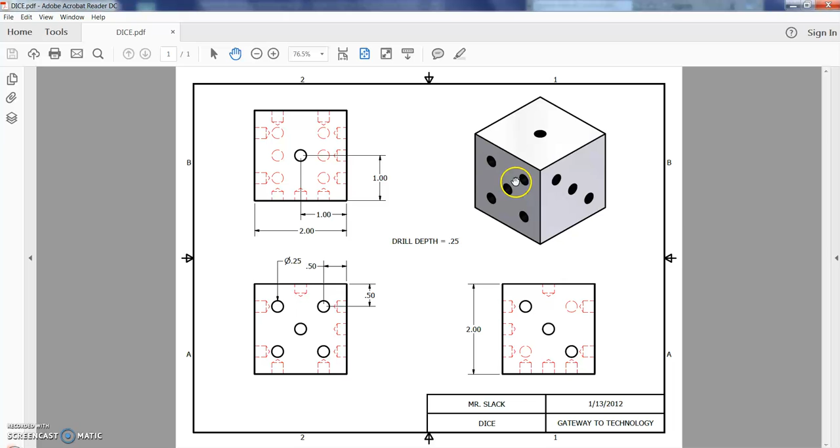So if I'm looking at this 5, when we extrude or drill the holes in, I can't see how deep they go in. So this gives us a little bit of visual of being able to see what the actual hole looks like on the inside. If we would cut that part kind of in half, that's what we'd see on the side. So that's what the hidden lines are for, just to show us the objects that we cannot see from the front surface.

So we're going to start out with making a 2-inch by 2-inch by 2-inch cube. I've already opened up my software. So you're going to open up Autodesk Inventor. And when you get to the home screen, you're going to click Part to open up a new part. And if you're already in Autodesk Inventor, all you're going to do is go to New Part and open it that way.

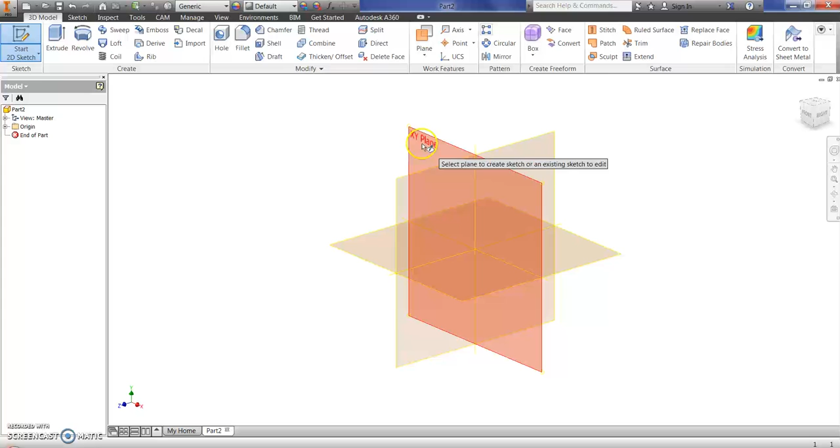So this is my drawing area. The drawing is clear right now. And just like last time with the cut block, we're gonna come up and start a new 2D sketch. And we're always gonna start on an XY plane right now. So I'm gonna click XY plane. And I'm gonna draw a rectangle. And again, it doesn't matter where right now.

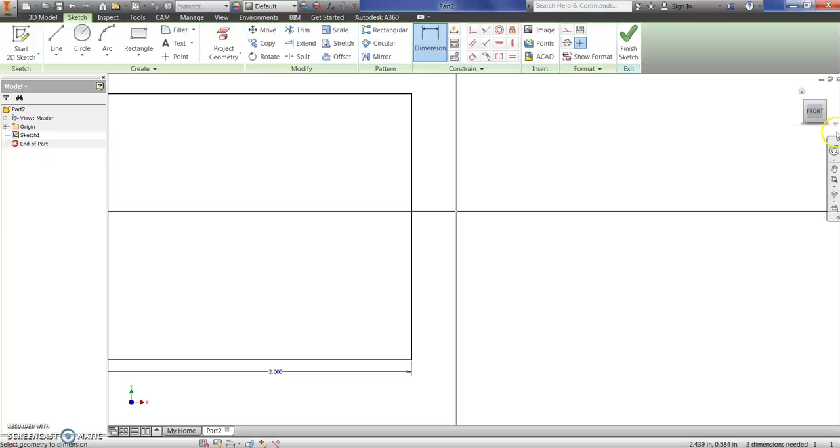And I'm gonna use my dimension tool. And I'm gonna dimension my bottom line. So this is my width, 2 inches. And over here, because some of my square got lost, I'm just going to hit my magnifying glass to position it back in the center. And then I'm going to change my height to 2 inches. So I have my 2-inch by 2-inch square.

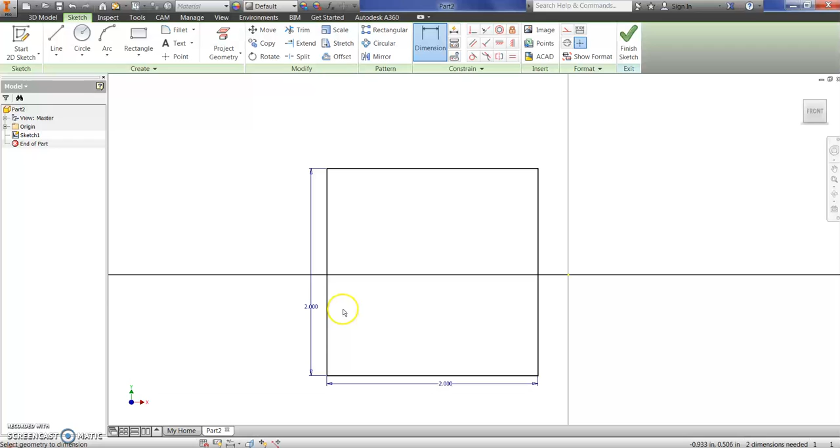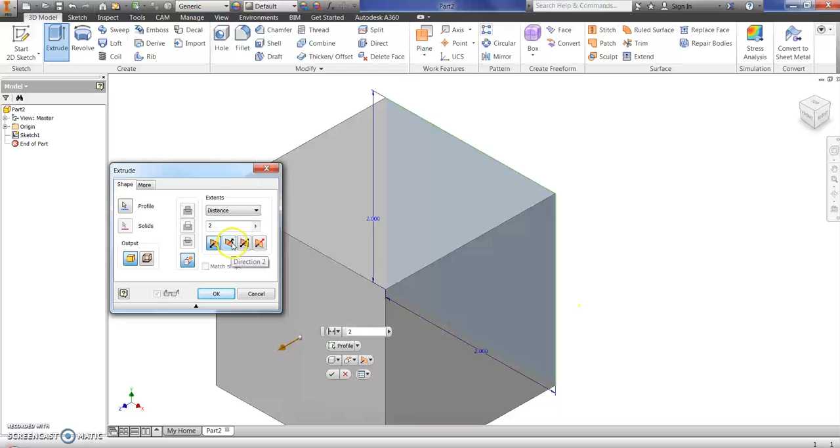Now I need to extrude it. So whenever you're done sketching and dimensioning, you're going to come up to Finish Sketch. I'm going to use my doghouse to position it back in the center. I'm going to hit my Extrude option underneath the Create command. And 2 inches. And I'm actually going to send it backwards this time. So direction 2. And then I'm going to select OK.

So I'm going to use my doghouse again. It will position it back in the center. So again, this should just be a review on how to make a cube. Again, it's 2 inches by 2 inches by 2 inches tall. So now the important part is putting on the actual holes of the dice. So if I switch to the actual drawing, on my front view of my cube, I need a 5. And that's where we're going to start.

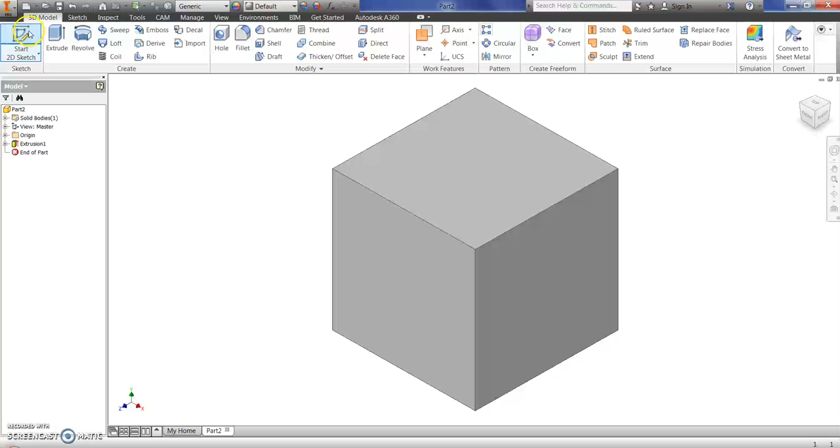So on this, I'm going to go up to Start 2D Sketch. And I'm going to click on the surface that I want to edit or that I want to add items to. So I'm going to come down here. I'm going to select this front surface. I'm going to click once on it and it lays it flat.

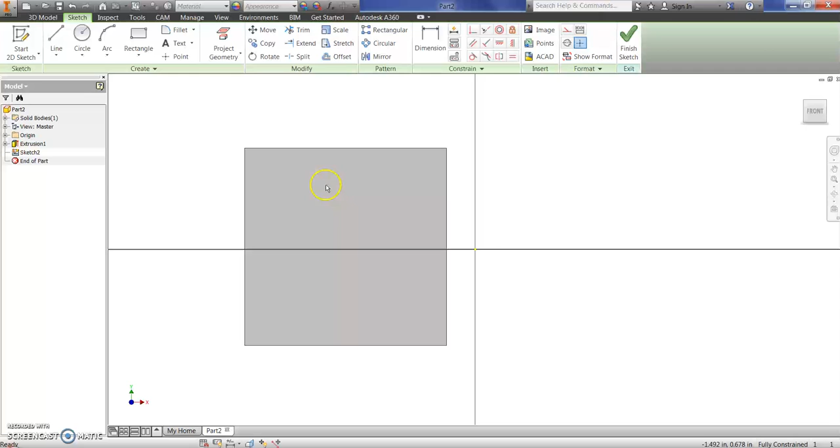So up on top here on the Create, there is an option called Point. And the nice part about the Point command is I can put a bunch of points in here. And when I select the hole option, it will automatically cut and center those holes right where that point is. So that's what's nice about the point command. We could technically use the circle to do it. The point command is nice because there are a lot more options to work with the actual holes when we get to the dice.

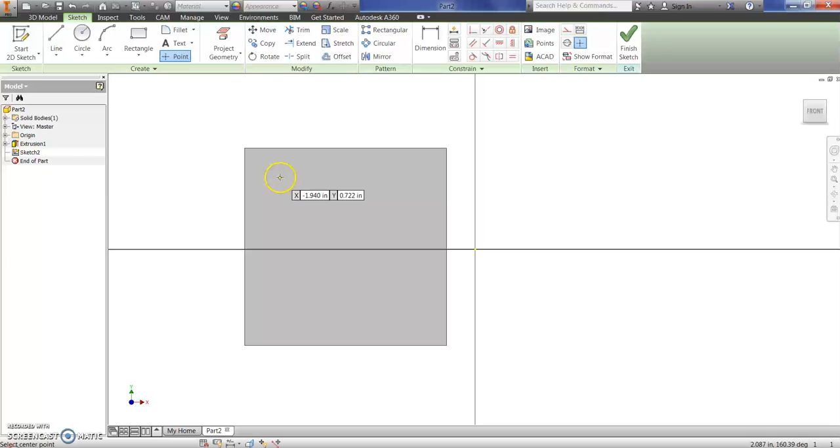So I'm going to select point, and I'm going to come down here to my cube, or my dice that I have, and I'm just going to put 5 points in. And it doesn't matter where they're at right now.

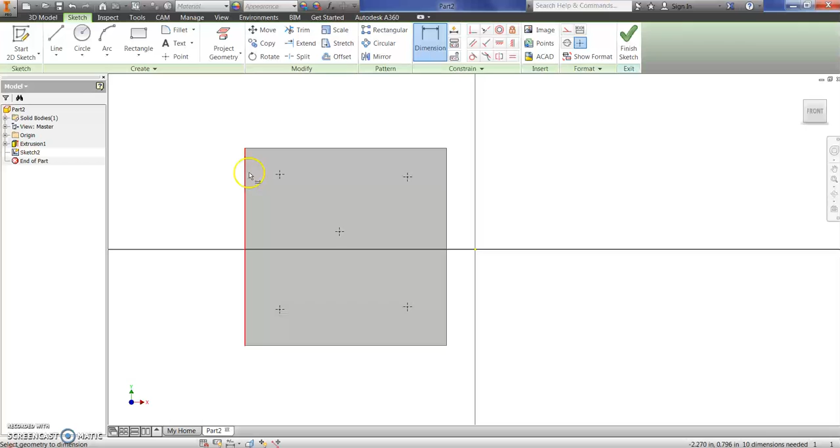So my 5 points. Now this is the tricky part about this program: when I go to dimension, we have to dimension these points and the location of them. Every hole that we drill, we always need a location, vertical and horizontal, plus a size. And we'll do the size here later. So we need to do our dimensions.

So if I look at my drawing and I look at the first hole, it's showing me from the right-hand edge it's going to be 0.5 inches to the center of the circle. And from the top edge, it's also going to be 0.5 inches away. So on our program, we're going to hit dimension, and this time we're going to select the point first.

We want this point to be a 1/2 inch away from the top edge. I clicked point once already. I'm going to come up to this top edge and click it. You should be able to get a dimension tool, and if it doesn't show up the first time, just click it again. I'm going to drag this out to the right and type 0.5.

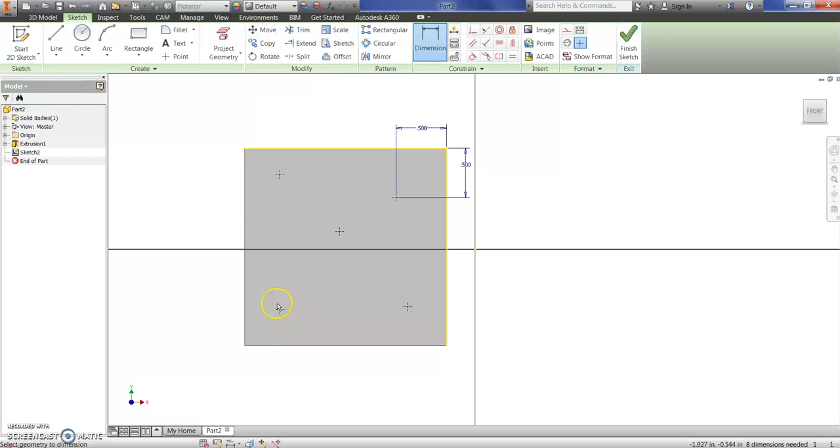So I have it positioned vertically; now I need it horizontally. I'm going to select the point to the right-hand side edge, and it's also 0.5. That's the same thing for all 4 corners. So I'm going to click the point to the bottom edge, 0.5 inches, and the point to the right-hand edge, also 0.5 inches away.

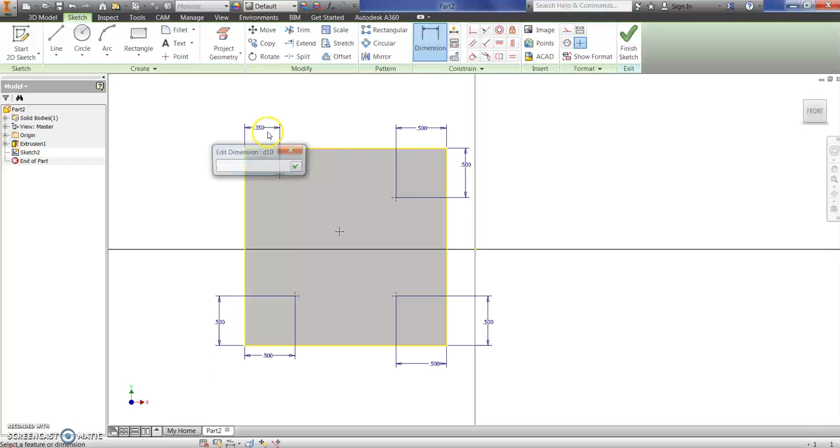Same thing for this one. Point to the bottom edge, 0.5. Point to the left-hand edge, 0.5. Point to the left-hand edge, 0.5. And then point to the upper edge, 0.5. So I have all these points located. The only one I need left is my center one.

My center point, if I look at my drawing, is going to be 1 inch by 1 inch away from the edge, so it's exactly in the center. I'm going to use my dimension tool, select my point to the upper edge, that's 1 inch. Then select my point to the right-hand side and move it up. That's also 1 inch.

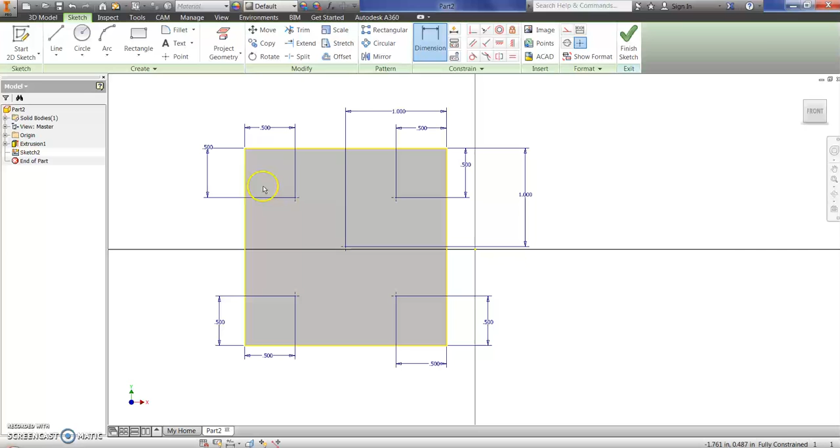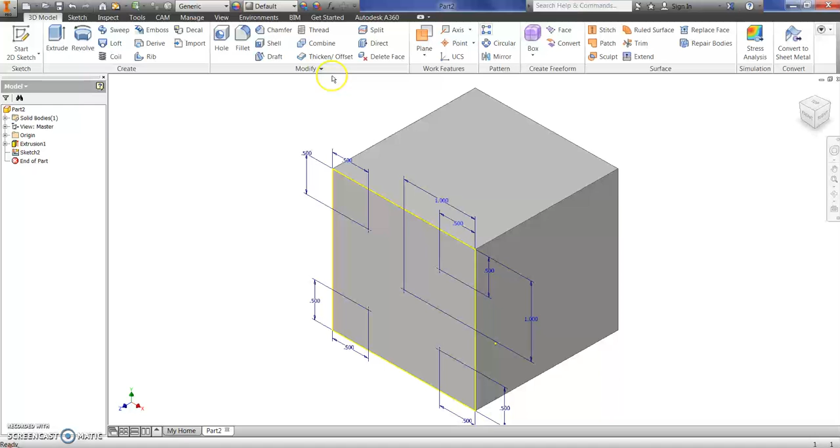So every point I have positioned horizontally, left and right, and if I look at my arrowheads, up and down. After you have all the dimensions done to each point, I'm going to come up to 3D model and use the hole option. Under modify, I'm going to hit hole.

Notice when I hit hole, the holes go all the way through the dice, and we don't want that. Down here where it says termination, which means where it ends, I'm going to change it from through all, because that's making it go through the whole part, to distance. This is the diagram of the hole. This is my depth, how far it's going to be drilled into the material.

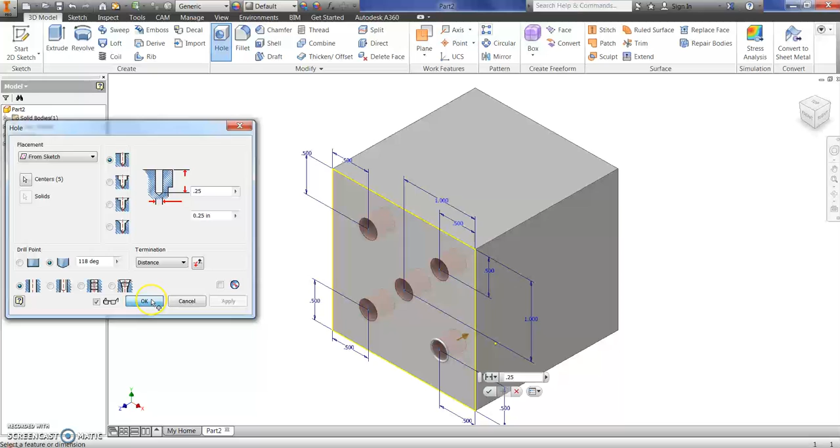I want to change that to 0.25 of an inch. And this is my diameter; I'm going to leave that at 0.25. When I'm done, I'm going to click OK. Now if I spin this view cube around, there's the 5 for my dice.

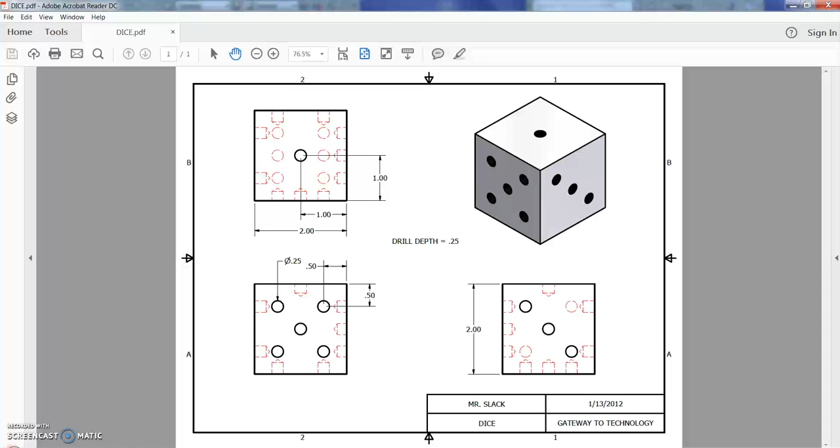So on your own, we know now how to do the corners. Compared to the 5, the only thing different about the 3 is you're missing these 2 points. All the dimensions stay the same, so you just repeat the process to put the rest of the numbers on. You're going to put the number 3 on this side and a number 1 on the top. On the rest of the sides, it's up to you, but when you're done the dice should have all 6 numbers on it.

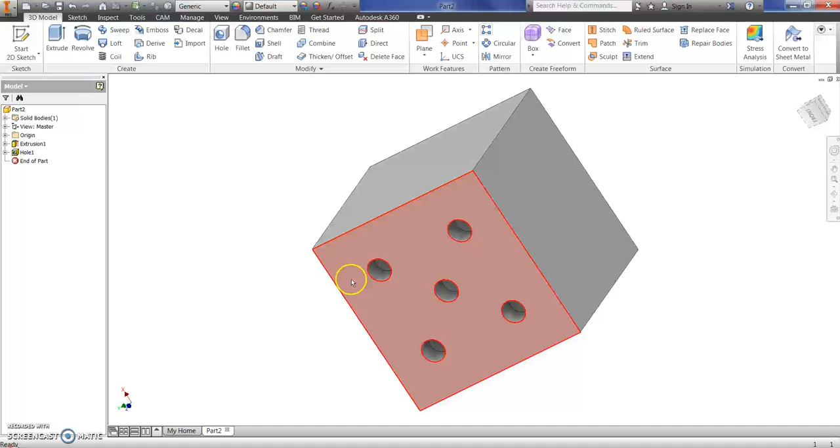So 1 through 6; we just did the 5 together. When you're done, as I showed you last time, you're going to save it as a part file in your H drive, and also save it as a JPEG to put in your portfolio.